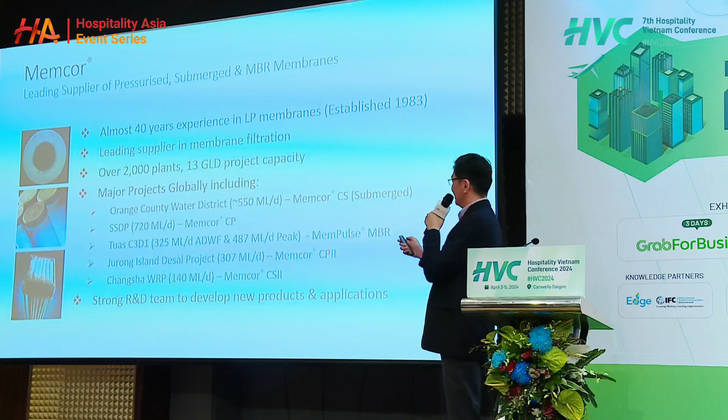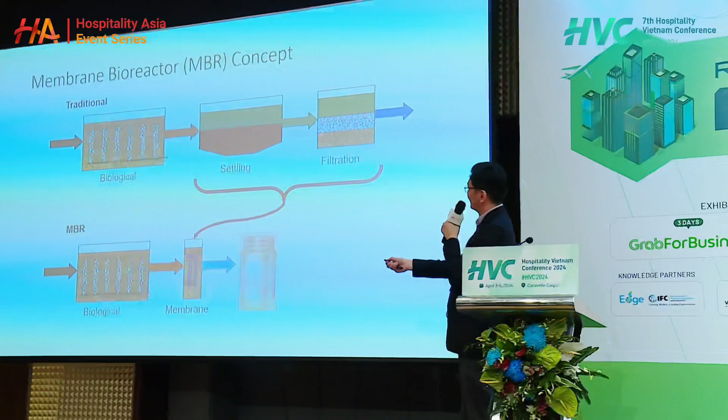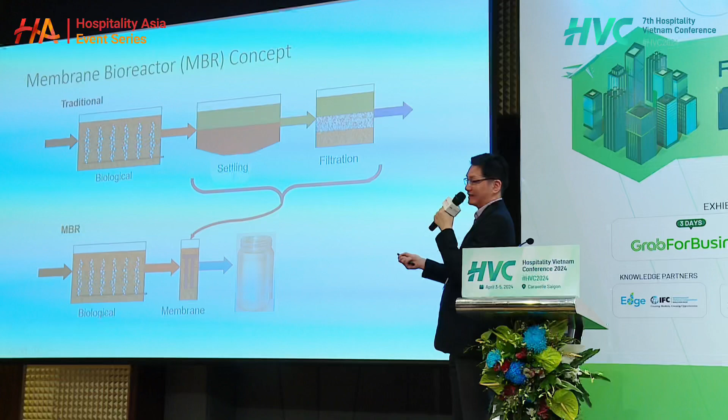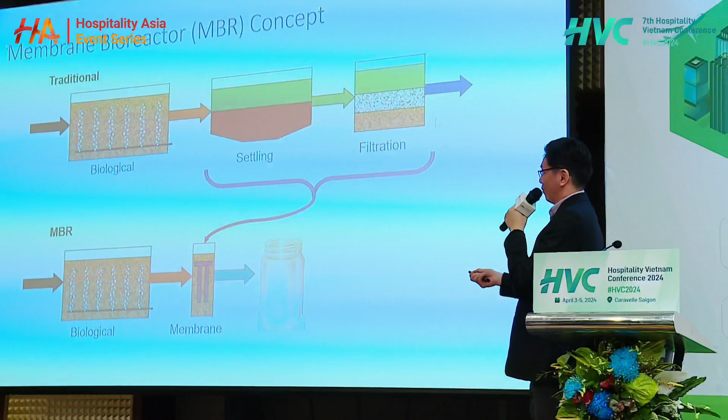So, what and why MBR for you? If you look at this, this is the traditional wastewater treatment method. You have a biological process, which is essentially a lot of aeration, you have the settling process, and then you may have filtration before you discharge into the drain or open water course. What we're offering, the new technology here today, is the membrane system.

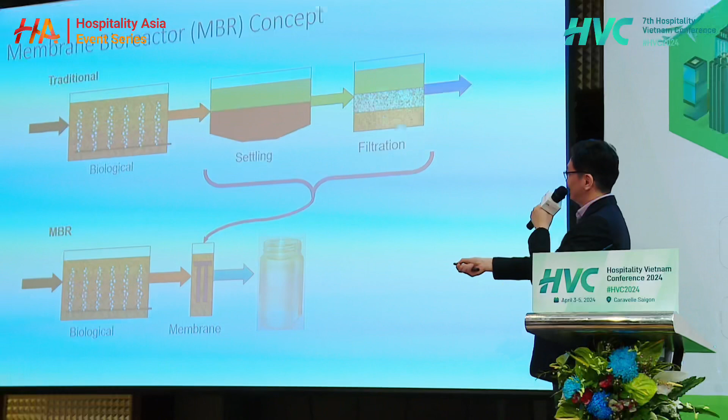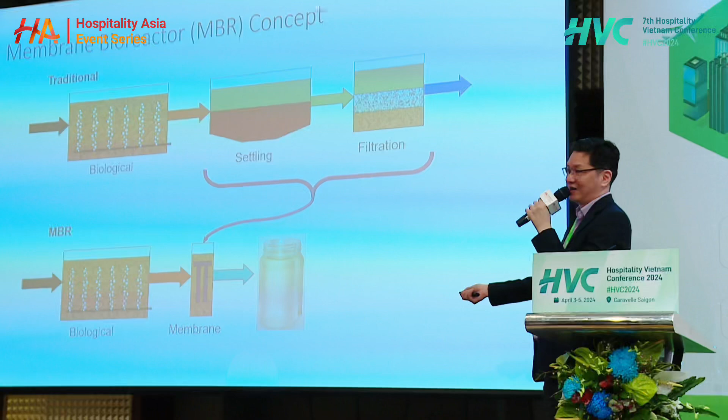Instead, it basically combines these two steps into one single step of filtration, and you can produce very high quality water that you can reuse in your facilities, for example washing, landscaping, toilet flushing, and etc.

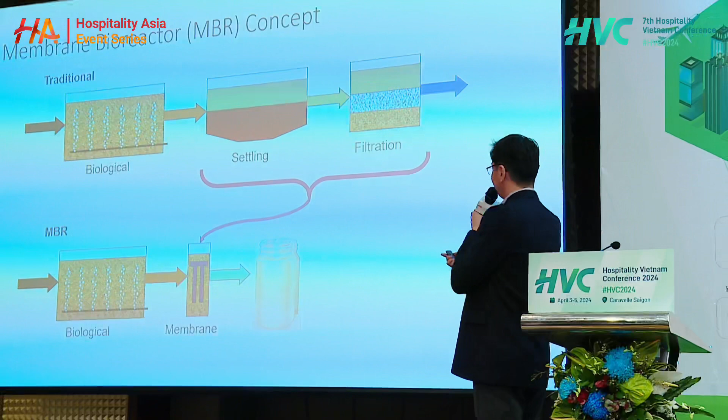So it's really compact, and if you have hotels, resorts, buildings and offices, real estate is money, right? Land is money. So the less space you use for treating wastewater, the more you can use for other facilities.

Now, the second benefit of an MBR is it produces excellent water quality. So here is your wastewater from your toilets, kitchens, and etc, and then we use basically a membrane filtration layer. We filter it and produce very clean water.

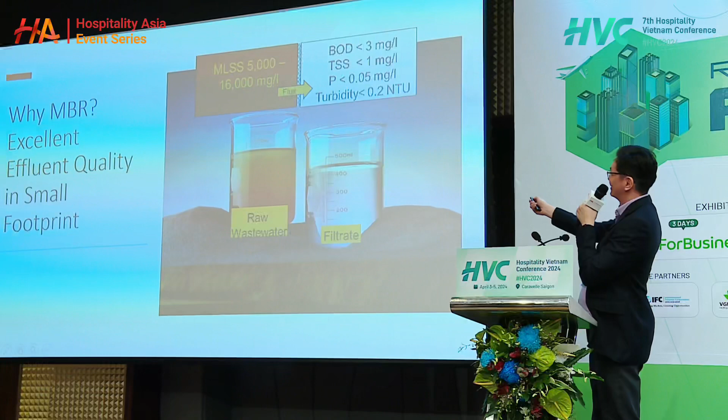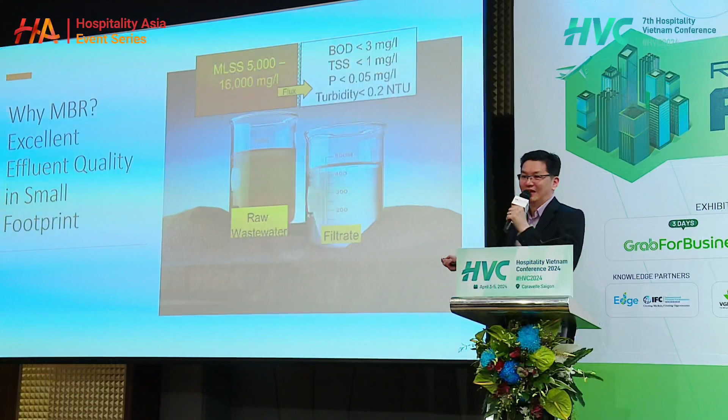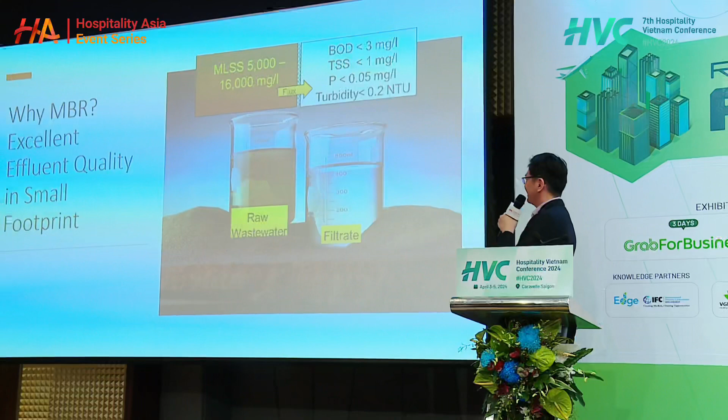Now, it's not drinkable yet, just to be clear, but basically all pathogens, viruses, bacteria, particulates have been removed. There's still salt in it, a little bit of salt. It depends on how it was used prior, but this is generally good enough for all secondary usage or non-drinking usage.

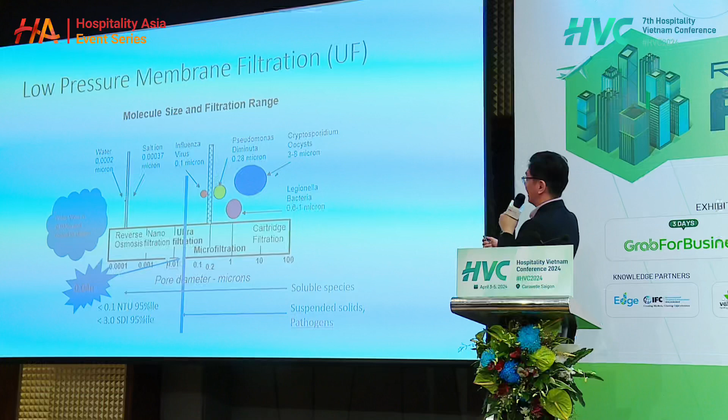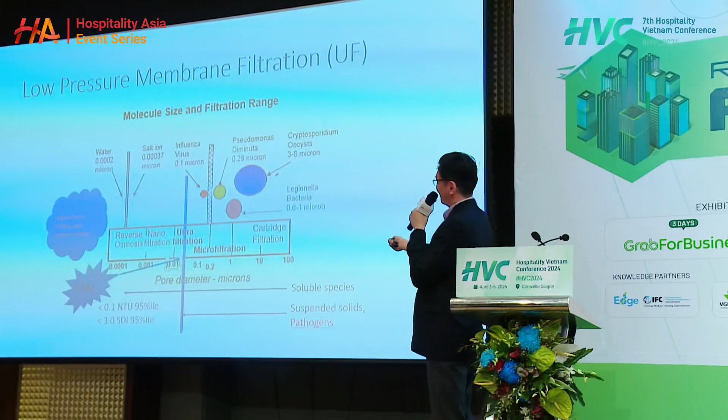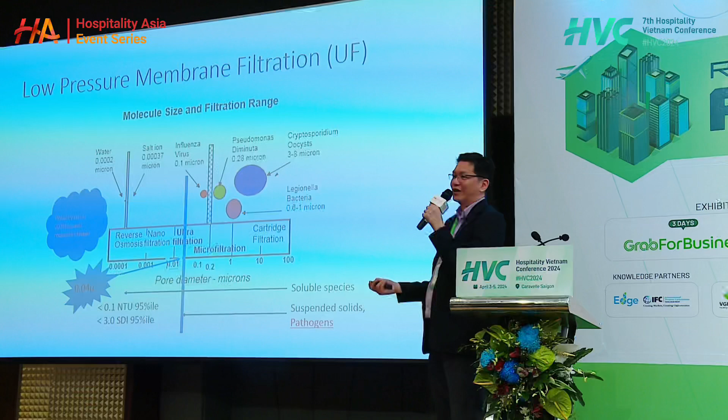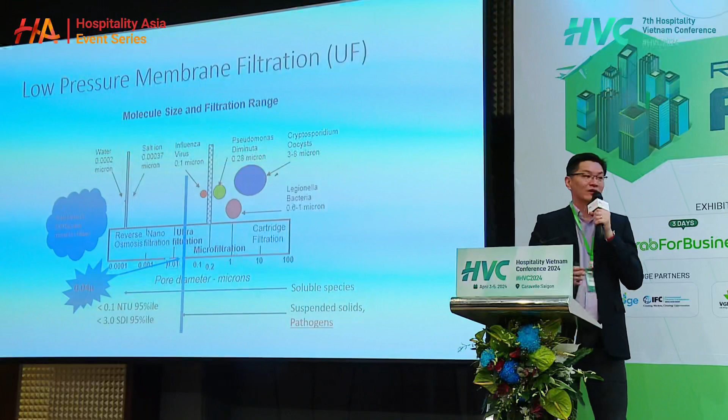Here, just to give you an illustration, this is a spectrum of types of technology you can use to filter the water. We're here at 0.04 micron, and at this size, it excludes almost all pathogens, all bacteria, and like 99.9% of all viruses. So this is clearly a good barrier. It's good enough, if you still don't trust whether it's good enough for drinking, but at least for a lot of secondary usage, non-drinking applications.

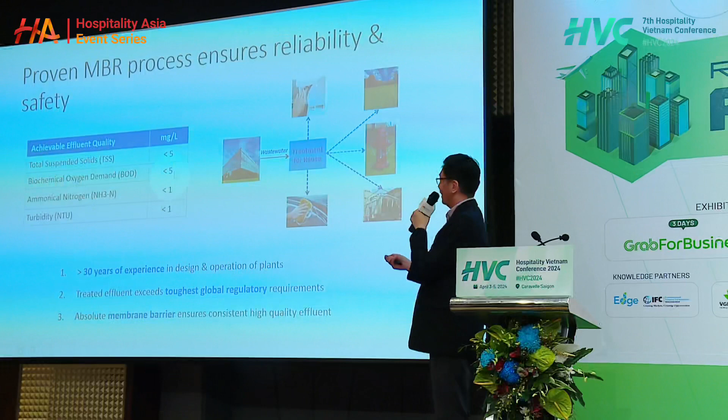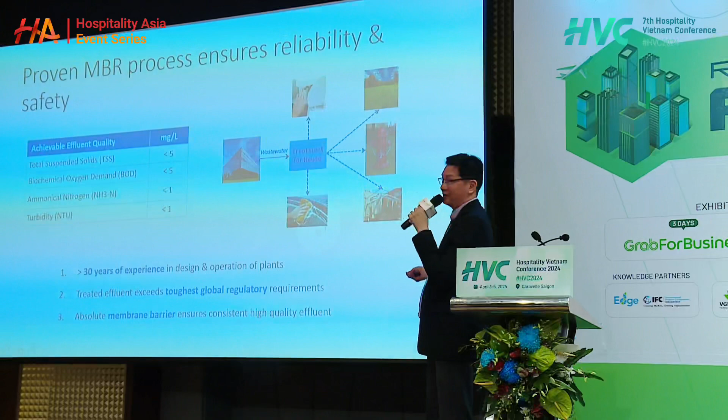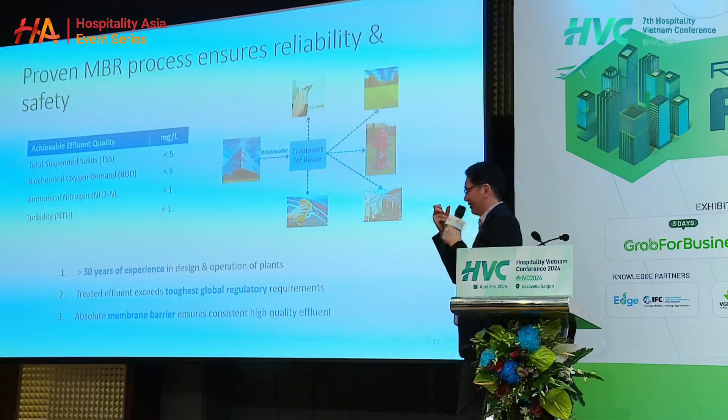Just to recap, so you produce wastewater from your property, and with the MBR process, you can use it for toilet flushing, landscaping, fire hydrants, cooling towers as well, and also washing. So there's a lot of water you can reuse, as opposed to just using groundwater or city water.

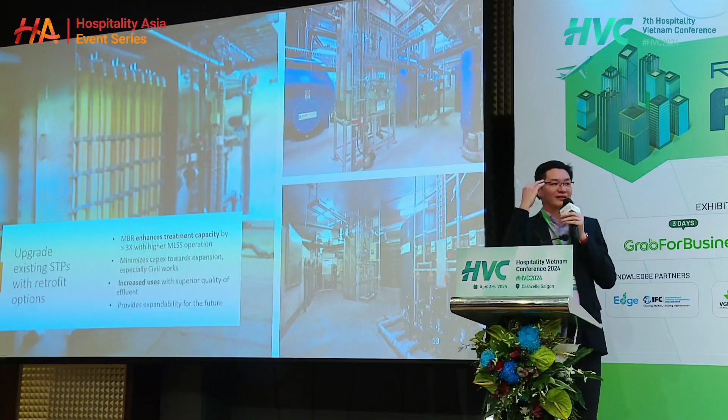Next slide. This is just some pictures so you can get a visualization of how an MBR plant may look like. These are all in the basements of hotels and office buildings, so we don't need a lot of height, you can put these membranes in place.

Because it's very modular, if you need to expand or increase the capacity, it's actually a lot easier to do that with MBR as opposed to the conventional, because if you have a conventional plant and want to increase the size or capacity of your waste treatment plant, you'll usually need more tankage, more civil works, more construction. But for an MBR plant, it's really quite simple to add capacity for the future.

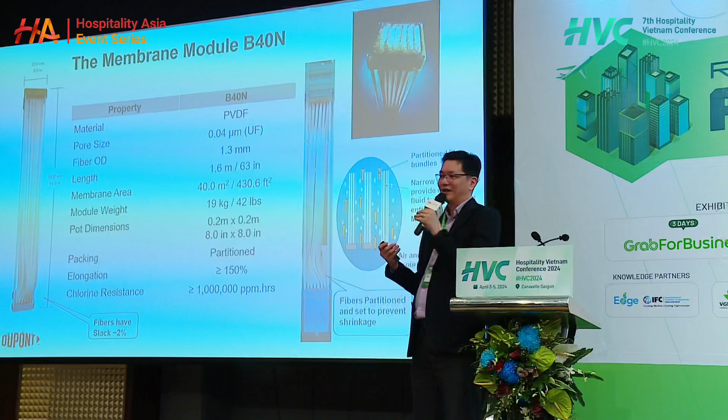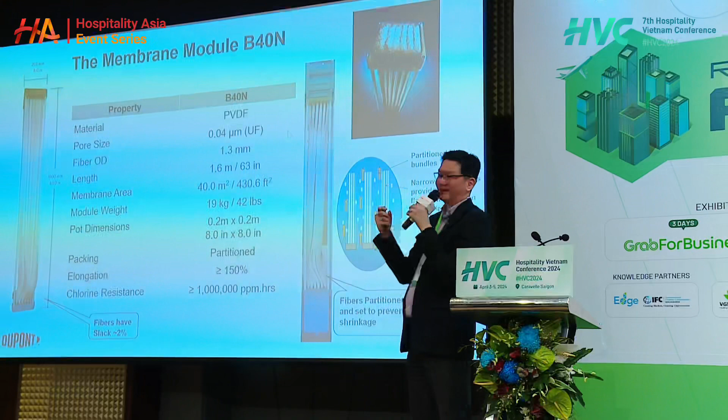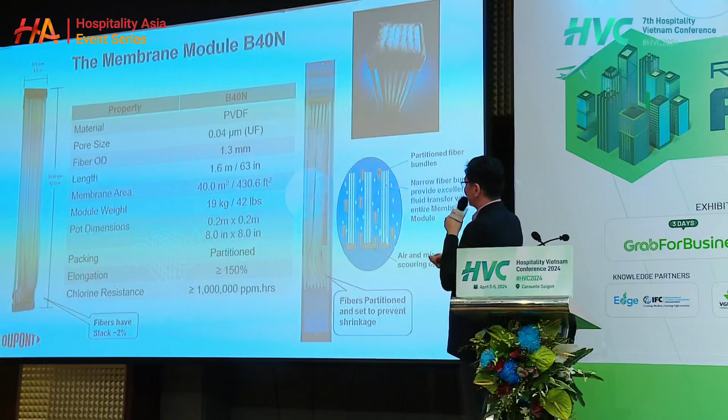I spoke a lot about filtration, but I just want to show you how the filtration module actually looks like. It's a bundle of fibers, thousands of fibers in a block of module that we put into the wastewater treatment plant to extract clean water, with these fibers acting as a barrier for filtration.

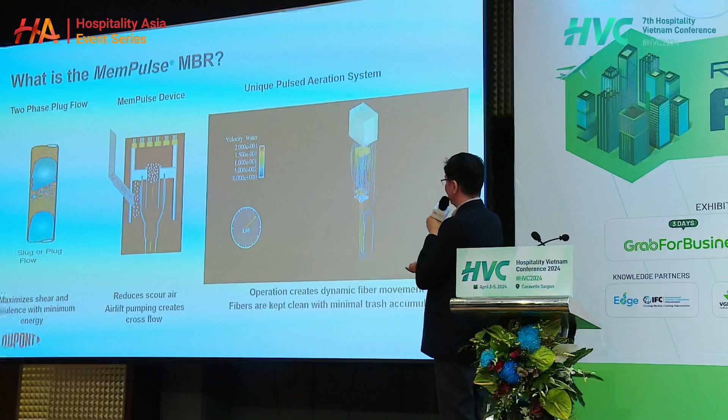Here I just want to show you an animation. Let me see if I can pull it up. Oh no.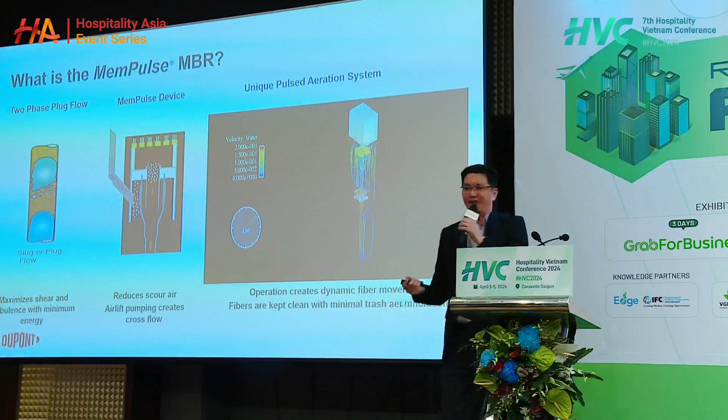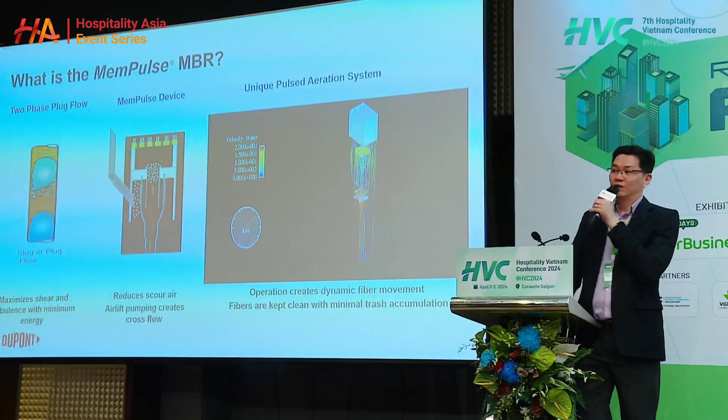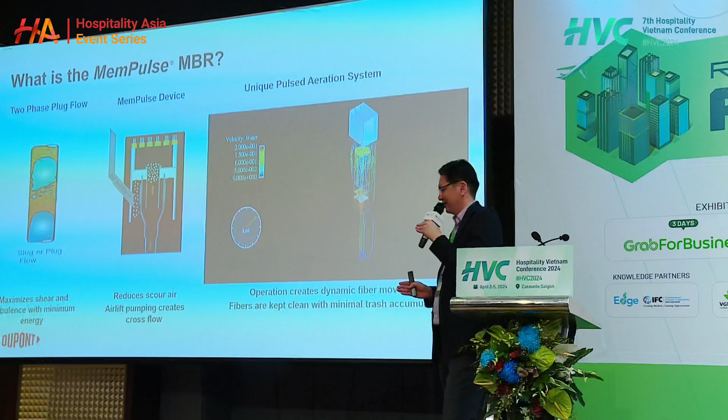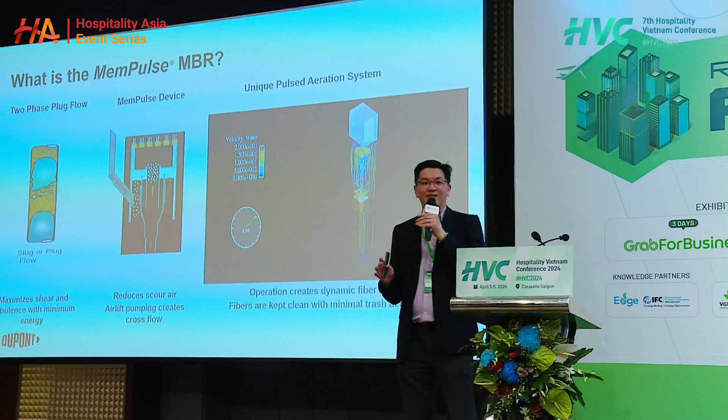There's a lot of MBR out there, but I can say for certainty that DuPont MBR has the lowest footprint and the lowest energy of all MBRs in the market. MBR is not completely new, it's been around for a while, but adoption has been exponential in recent years because the energy required to operate an MBR is getting less and less. If you go to Singapore right now, the only wastewater treatment plants being built, and most existing ones, have been converted to MBR. So it's definitely the future.

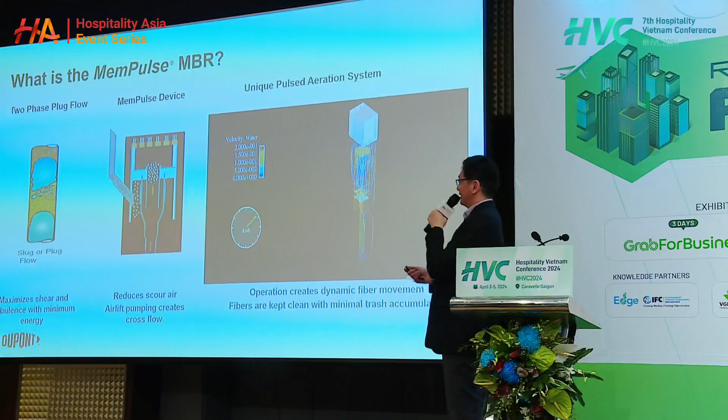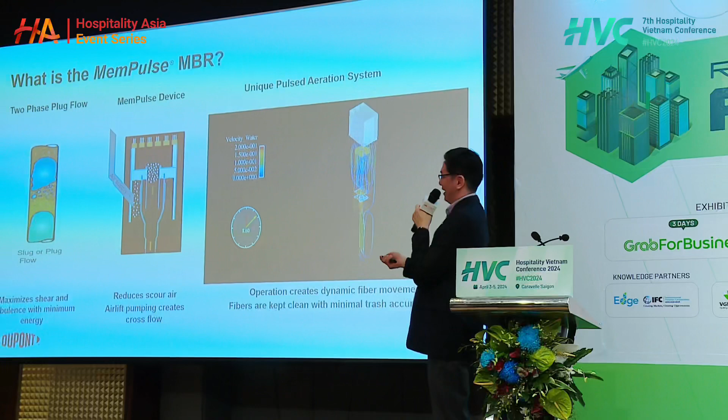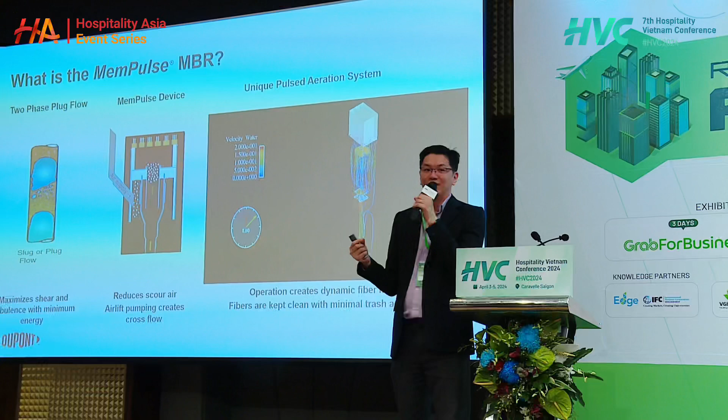So when I say DuPont has the lowest energy MBR, what's the secret? We have what we call a MemPulse device, a patented technology. It has the ability to generate the most air scour and cleaning for the fibers with the least amount of energy or air needed to do that, and this is due to the pulsing device from DuPont.

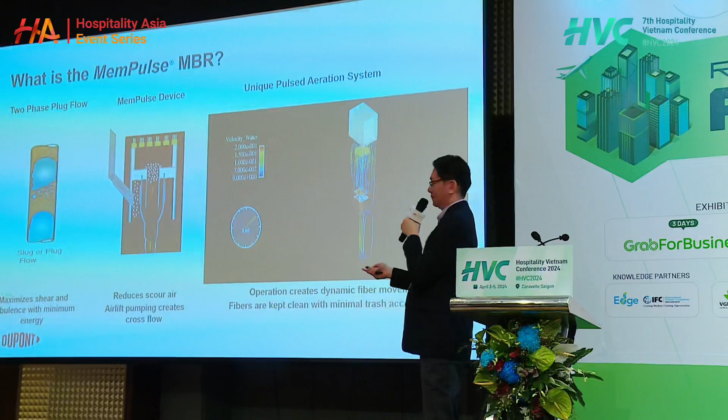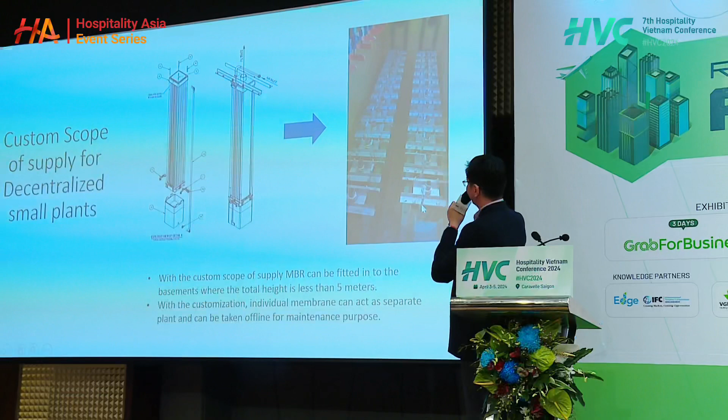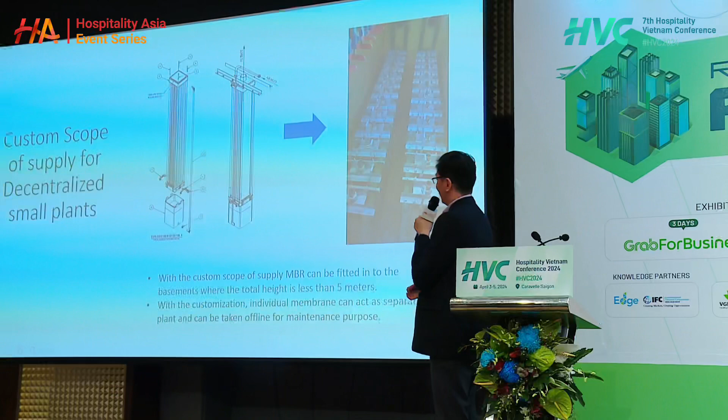If you look at the actual installations, it's very modular. It can be fitted into tanks on a module basis, and each module has its own set capacity for filtration, so it's really easy to upgrade and expand. You don't need a lot of height, 5 meters is more than enough for this filtration.

With my latest count, I have more than 250 installations in many properties around the world right now. This may surprise you, but India is leading the charge with this. A lot of MBRs are put into commercial buildings, hotels, properties around the world, so adoption is really very high in India right now. If you need help with any designs or whatnot, we can help you with the MBR technical side.

I'm down to my last couple of slides here, just want to make sure I have time for Q&A as well. These are two projects we did in Australia many years ago. This is basically an office development building with 7462 population, and we recycle this water for toilet flushing and cooling tower. The MBR is not the only process, but it is the main process of the entire wastewater treatment process.

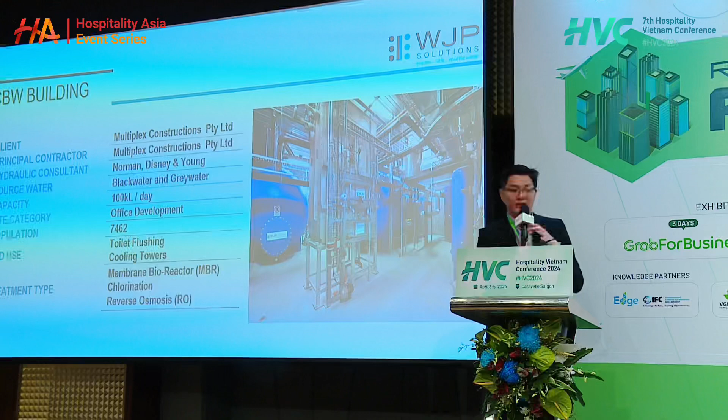Okay, any questions? Yes.

You're talking about your small to large scale. In one of your slides, you mentioned the Novotel Group and other bigger entities. I'm assuming they would be adapted to like 150 keys, 200 keys, and above. But when you say small scale, what's the sweet spot to introduce a system such as yours in a boutique resort, for example, of less than 100 keys?

Oh, that's a great question. There's no minimum. I'm not familiar with the key terminology and measurement, but I can speak to this because this is like a couple of modules here, and this is for 100 cubic meters of wastewater per day. I'm not sure how much wastewater a small boutique hotel would generate, but no, small is too small... I mean, nothing is too small.